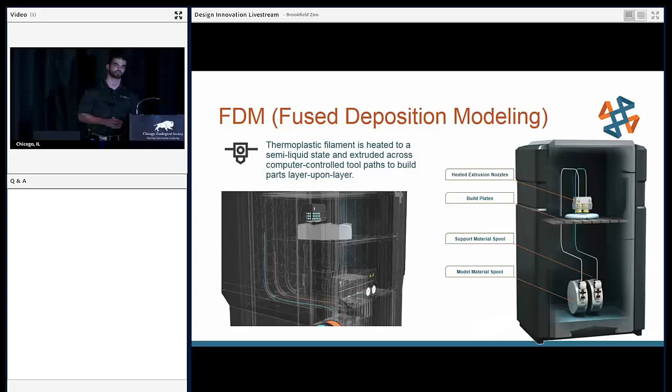So first up, like I said, we'll talk Stratasys. Stratasys has two main 3D printing technologies with polymer, the first one being FDM. FDM stands for Fused Deposition Modeling, and if you've ever heard of 3D printing, you've probably heard of FDM before. It's one of the oldest, most tried and true 3D printing methodologies out there.

So let's backtrack and just talk 3D printing in general for a second here. So the workflow and how all 3D printers operate is you have your model that you've created in SolidWorks, right? You have your 3D model. You're going to feed that into whatever 3D printer's print preparation software, and what that print prep software is going to do, it's going to take your model and essentially slice it in the Z direction vertically and create a bunch of these 2D layers to build up your part in a 3D volume through the Z axis. So where 3D printers differ is the way they go about creating those 2D layers in the physical world.

So jumping back into FDM, the way FDM accomplishes this is what we call a highly precise CNC-controlled hot glue gun, right? So we have a precise heated extruder nozzle, and we're feeding into that thermoplastic filament. And we're able to extrude that very precisely through our 2D layers in order to draw out our geometry layer by layer in the Z height. So that's how we're able to draw out our layers and build up our 3D part volume.

Here's a look at some of Stratasys' FDM systems. So you can see on the left here, we've got our desktop entry-level machines with the Mojo and the uPrint. In the middle, we have our office lineup with the F123 series. If you're familiar with the old Dimension series machines, these are the next generation of the Dimension machines. They've improved a lot in terms of build volume, build speed, as well as material options. On the Dimension machines, you only had one material, ABS. Now on the F-series machines, depending on the machine, you have between 3 and 4 materials available to you.

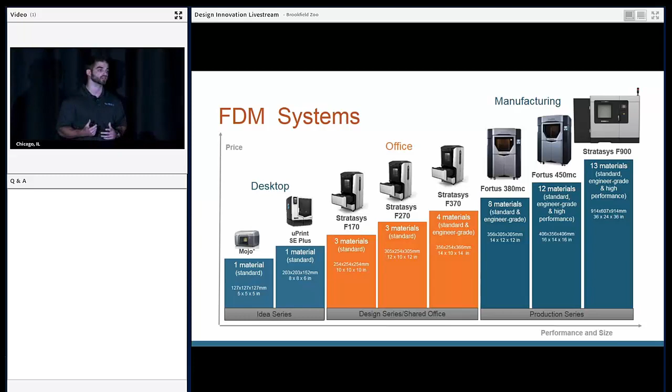So here's a look at the FDM materials we have available. Like I said, on our general side of things, we have our ABSs. ABS, if you're not familiar, is a staple in the thermoplastic injection molding industry. Legos are made out of ABS, just to give you a gauge there. We also have ASA and PLA. From there, we step up into our engineering grade materials. This is where we get into our polycarbonates and our nylon. So we're stepping it up in terms of toughness and strength there, a little bit more than what our general materials were capable of.

From there, we move into our high-performance materials. That's where we get into our Ultem resins and our carbon fiber and our PEKK materials. So now we're talking extreme heat resistance, extreme stiffness, extreme chemical resistance, things that really need to stand the test of time and abuse on the shop floor environment. And then down here, we'll talk more specifically about this one as well. ST130 is a sacrificial tooling material. More of a niche application, but it does it very, very well.

So we're going to talk about some of these materials and highlight them individually a little bit more. So first we have ESD PEKK. ESD stands for electrostatic discharge. Normally, obviously, plastics are insulators. They can potentially build up a static charge, and where that becomes an issue is if we're trying to house

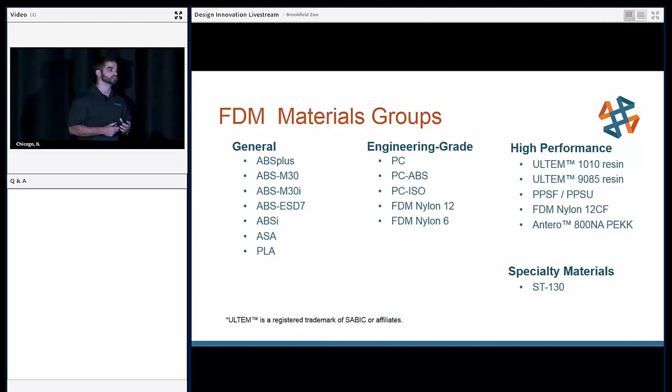electronic components. Any sensitive electronics, when that static charge builds up, has the potential to damage anything that you're trying to protect with that housing, which obviously defeats the purpose of having the housing in the first place. So with this ESD material, you can safely create electronic enclosures and know that your components are going to be safe from electrostatic discharge. PEKK material, if you're familiar with that, has excellent chemical resistance and very favorable thermal properties. So the ESD combined with the PEKK is a very useful new material we have available.

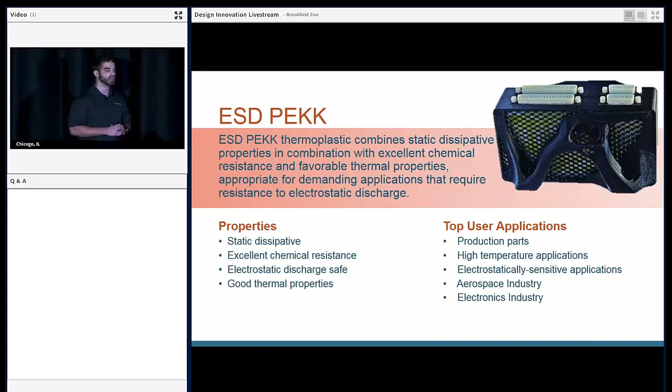Next up, this is kind of everybody's favorite hot button material currently, the Nylon 12 CF material. It's a composite material, the base being Nylon 12, impregnated with carbon fiber filaments. So we're able to lean on the extreme toughness of the Nylon 12 material, and then we get some pretty heavy-duty stiffness with those carbon fiber filaments in order to create a material that has outperformed by almost 3 times the stiffness of any other 3D printed material previously available through Stratasys.

So we're able to print very, very strong, very stiff assemblies, and a lot of customers have seen success replacing even light-grade aluminum parts in assemblies with these printed plastic parts due to the toughness and the stiffness that we're able to get with the Nylon 12 CF.

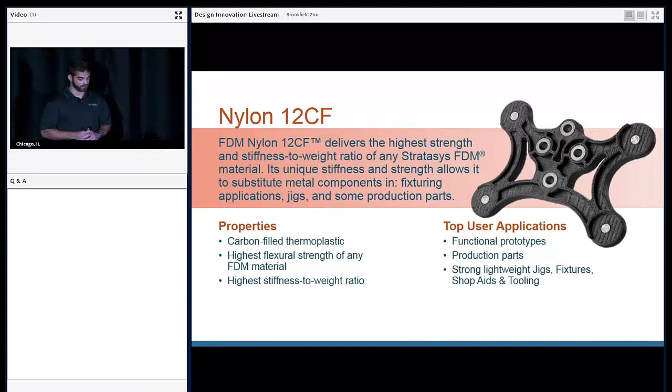Up next, we have the ST130 material. So what we're doing here is anywhere we're trying to do any kind of a carbon fiber epoxy wrap and let that cure over our mold tool. Traditional methods, making these molds by hand, it's doable, but it's very operator dependent, and it's very hard to get consistent quality results. By printing out, we can see the white there is actually what has come off the printer out

of that ST130 material. We'll take that tool, wrap it with our carbon fiber, and let that cure. Once that's done curing, we can very easily and passively soak that tool out, leaving behind what we wanted originally, which was that carbon fiber tubing. So it's a huge help in that sacrificial tooling process to be able to lean on the abilities of additive manufacturing in terms of no or low tooling and very flexible geometries, and to be able to get high quality consistent parts out of that.

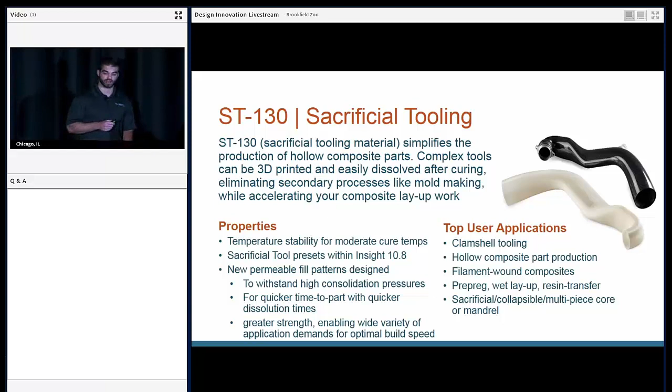ULTEM 9085 Aerospace Certified. So this is the first aerospace certified material, and Stratasys had to go through some pretty rigorous testing, not only for the material properties to be confirmed, but also for the machine making the material and actually printing the parts. It was originally a material that was not aerospace certified. The aerospace industry was very, very interested in it, and so Stratasys chose to jump through these very stringent different certifications required by the industry in order to get this aerospace certified. So there are 3D printed parts being used on different aerospace assemblies today.

Next up, we have our newest material, which is Antero 800NA. It's a PEKK-based thermoplastic. It is very physically strong and has great mechanical properties. It's not quite as strong as the Nylon 12 CF that I talked about before, but where the Antero really shines is the super high chemical resistance.

So anywhere your plastic parts are going to come into contact with any kind of corrosive chemicals like fuel or hydraulic fluid, anything along those lines, you might want to be looking at this PEKK material, as well as for the ultra low outgassing, anywhere we have very high concerns about outgassing. Where we've seen a lot of interest in this is in space applications for space stations, where we have a limited volume of air and we have to be very careful about what we bring on board in terms of outgassing. So because this material has such low outgassing, space applications are very excited about that.

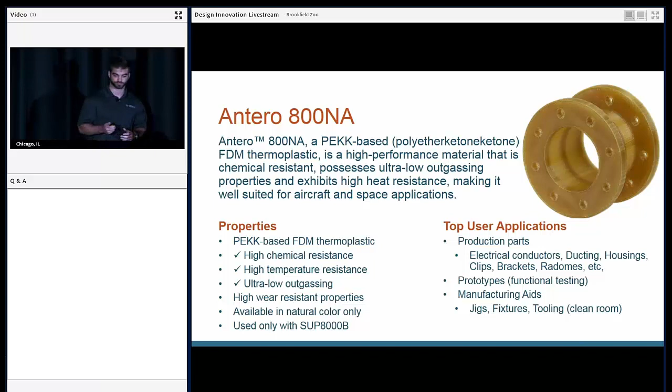So I had mentioned that Stratasys has two 3D printing technologies. We just talked FDM. The second 3D printing technology they have is called PolyJet. Now the way PolyJet works, if you remember from all 3D printing, we're slicing things in the Z layer. The way PolyJet goes about building up those layers in the Z height is very similar to how your inkjet printer works at home.

We are taking resins out of a print head and we're spraying them onto a build tray. After that build tray has been sprayed, we're passing a UV light over those liquid resins to cure them into a solid. And then the build tray moves down in the Z direction. We repeat the process over and over again, and that's how we're building up our layers in the Z height.

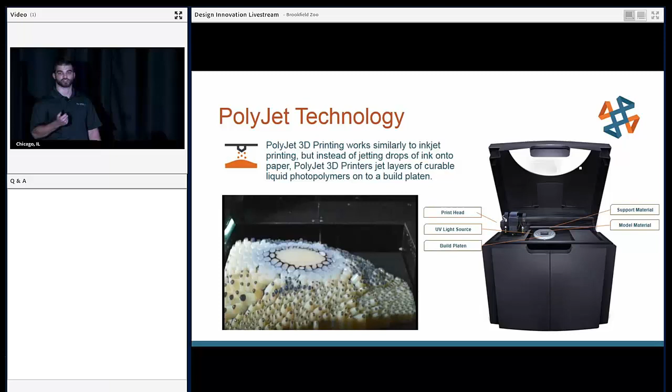What this allows us to do is get very, very fine details like you would expect off your inkjet printer at home. We can get that with a 3D printer. So now we can do different things like mixing materials, get very high resolution prints, full color prints, things along those lines is what we're talking in terms of PolyJet.

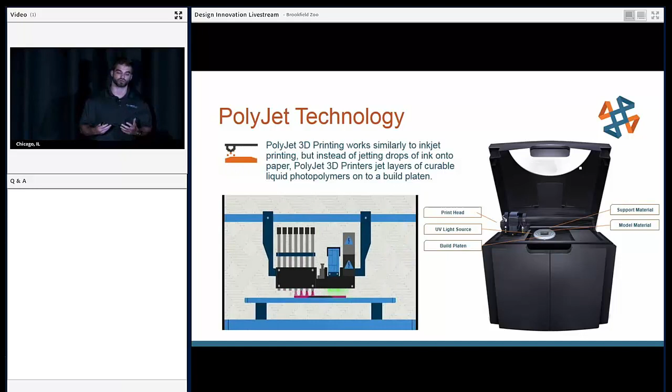Different PolyJet systems currently offered. So again, kind of same theme here. On our left, we have our entry-level machines with the Objet 30 Pro and Prime. These are just single material machines, so you are able to get very high resolution prints, but you're only going to be printing in black or white or blue, one at a time.

In the middle, we have kind of our office engineering grade Objet Eden and Connex. So these are 2 to 3 material machines. We can start getting into the material mixing realm, but we're not full color yet. Once we get up to the Stratasys J750, J735, that's when we get to our full color capability.

We have a full CMYK palette as well as clear and different rubber-like materials, and then we can incorporate all into the same print. So now we can get prints that not only have a full color spectrum on there, but include real touch, real feel, rubber-like textures, clear, all different kinds of things to create very photorealistic parts, very good for industrial designers, people trying to make end-use prototypes to get a very nice mock-up of what they're trying to do.

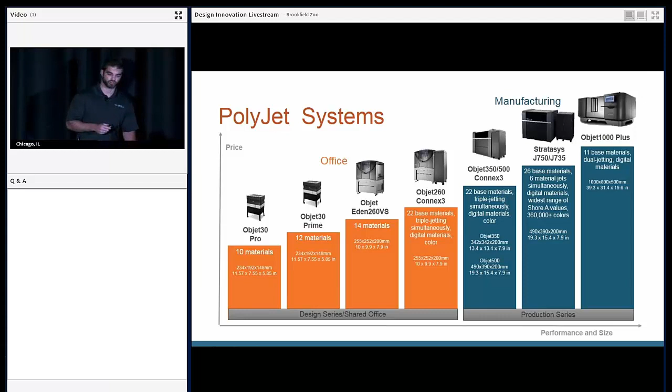Here's a look at our PolyJet materials. So on the left for our general, this is where we're just going to have our base colors, like I mentioned before, CMYK, white, clear, things along that line. I mentioned our flexible materials. So we have Tango and Agilus. These are our rubber simulations. And then we also have specialty medical. So we have dental materials, VeroFlex hearing aid materials, things along this line that really benefit from the high resolution and high fidelity of PolyJet systems.

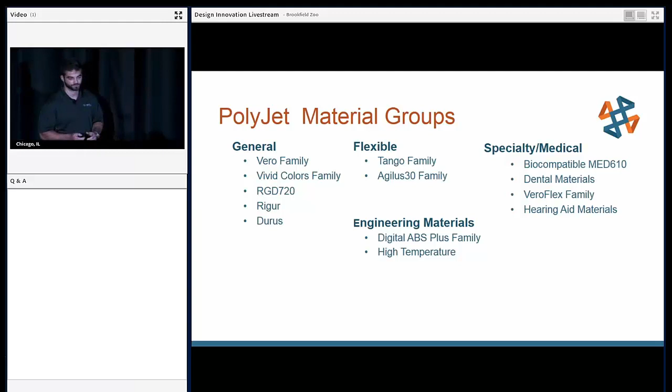So touching a little bit more detail on the Agilus 30. So if you're familiar with Tango, Tango was kind of our old rubber simulation material. Consider Agilus Tango 2.0. It's the upgraded version. So a lot more tear resistance, a lot more elongation at break, just a better simulation for your rubber applications than Tango was able to do in the past.

We also have a new lineup of vivid colors that is in the process of being released. So the original Vero colors, Vero Cyan, Vero Magenta, Vero Yellow, things of this nature had an opaque base to them. One of the things upgraded between the old material and the vivid material was that when you're trying to mix too many colors together, that opaque base kind of muddied the colors and made it very difficult to get very fine control over the color palette that you were able to print.

By switching over to a transparent base instead of an opaque base, the new Vivid Vero color family is able to have a lot finer control and expand the color gamut of the machine quite significantly. So we currently have Vivid Magenta and Vivid Yellow out. Vivid Cyan is on its way, and we are on our way to expanding our color palette from 360,000 colors upwards towards 500,000 colors. So off of a printer in one print, we can potentially print 500,000 different colors.

GrabCAD Voxel Print. So this is a software-controlled process, and what Voxel Print is, so a voxel is a volumetric pixel. So think pixels on your TV screen, right? You've got a length and a width to them. Now a voxel has a depth to that as well. And what a voxel translates to in terms of PolyJet printing, that's the smallest droplet that we can control and print at a time. So with voxel printing, we can potentially control every single droplet independently within the print.

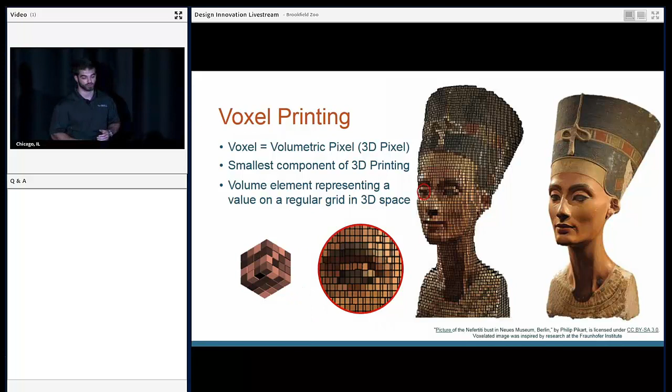You can see here, obviously, we've got this bust of Nefertiti with an over-dramatized voxelation of it. Obviously, we're going to be a lot finer with the PolyJet technology. This is very useful for artistic things like this, as well as controlling the internals for medical models and mechanical models. So how voxel printing essentially works is, if you can imagine, if you have 1,000 progressive slices like below, you can stack them together as they change through space and create a very, very unique, interesting model here as we're controlling the internals very tightly through voxel printing.

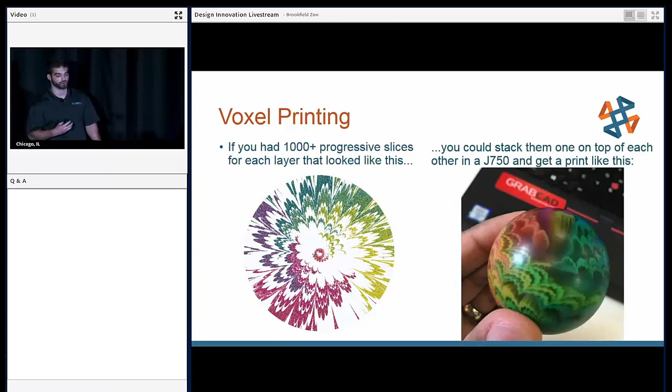So like I mentioned, we have very high use in the medical industry where we want to control that internal geometry and make it exactly how we were looking to get it, as opposed to just a kind of a color wrap around the outside. Now we're able to control that internal geometry very, very tightly.

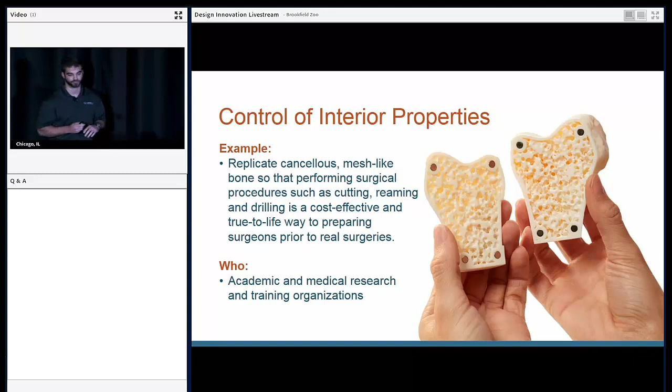Additionally, a great use case for voxel printing is Laika Studios. If you've ever seen the movie Boxtrolls or Coraline, it's in their portfolio. Laika originally came to PolyJet. They really liked the technology, but their one complaint was the eyes. They weren't able to get the eyes as lifelike as they needed to, and something that was very, very important to them, a complaint was zombie-like or dead-looking eyes.

So by being able to use voxel printing, they're able to give their eyes much more depth, much more color, and give them that lifelike ability that they were looking for to make a lot more believable character for their films. So Laika is a huge proponent of voxel printing and uses it constantly. So what they'll actually do is they'll print out all the faces and different actions of their characters and use those for their stop motion animation films, as opposed to what they were doing before by hand. So it speeds up their process a lot more.

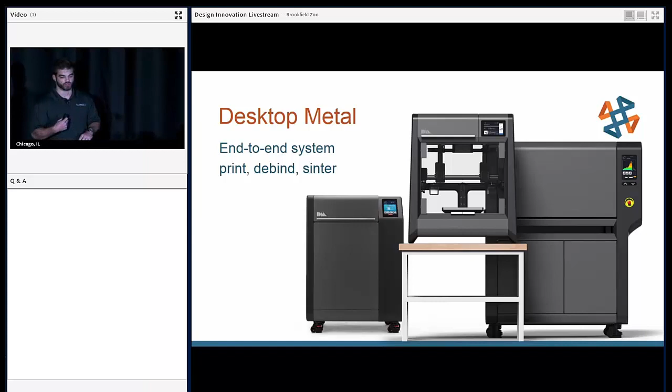One of the most exciting things about the Desktop Metal system is that it's about 10 times cheaper than traditional powder bed fusion systems. So we can see the comparison between powder bed fusion and the DM Studio system there. So if we're just looking for metal prototypes in the office, the DM Studio system is a great economical way to get started down that path.

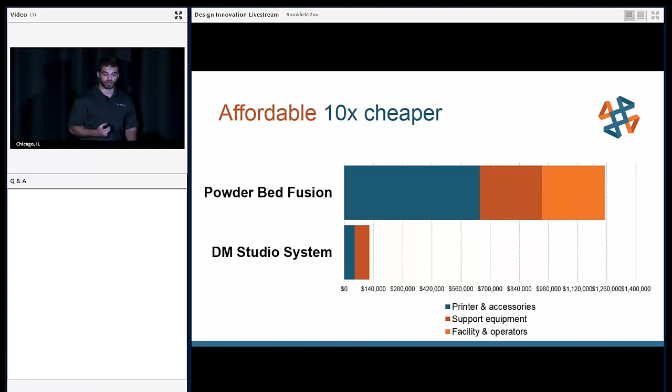So again, the idea behind this system is office friendly. We want it as office friendly as possible. We don't want metallurgists on staff. We don't want to have hazmat suits in order to operate our equipment. We want to be able to get parts very, very quickly. Here's a high overview of the process.

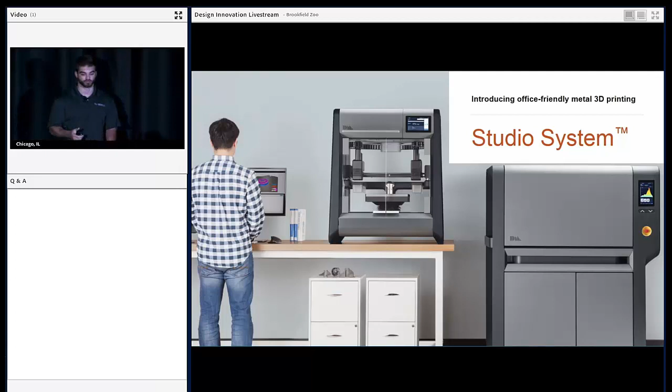So we start with bars of feedstock, and this feedstock is comprised of about 80% metal powder, 20% polymer binder. And what that allows us to do is we feed that into, like I said, an FDM style print head, so a heated extrusion nozzle, and we melt the plastic and flow the metal powder out. So we're nowhere near metal melting temperatures at this point. We're just melting that plastic and using that plastic as a vehicle of transport to flow that powder out and create our print.

So then we get all the benefits of 3D printing. We don't have tooling. We don't have long setup times. We don't have long programming times. We can just get that nice flexibility of 3D printing in a metal environment.

From there, we move to our debind, which is a liquid debind bath, and what that does is it soaks out our polymer binder. We don't want that polymer binder in there because when we move to our sintering process, it's going to really screw with our metallurgical properties and it's going to make for a large mess. So we really want to get that polymer out of there in the debind phase, and then from there, we move into the sintering phase, and that's when we heat the semi-metal object up to just below its melting point, and then those particles coalesce together and create a fully dense metal part.

So here's a closer look at the Studio System printer. Like I've been saying the whole time, very similar to FDM, very familiar design guidelines, and the biggest selling point, in my opinion, is the office-safe material. Normally for metal 3D printing, you're dealing with metal powders. Those can get in the air. Like I said, you have to have a hazmat suit. If you inhale any of that, that's very, very serious, and you really don't want to be handling that powder. So in order to be office-safe, they went with the metal rod design.

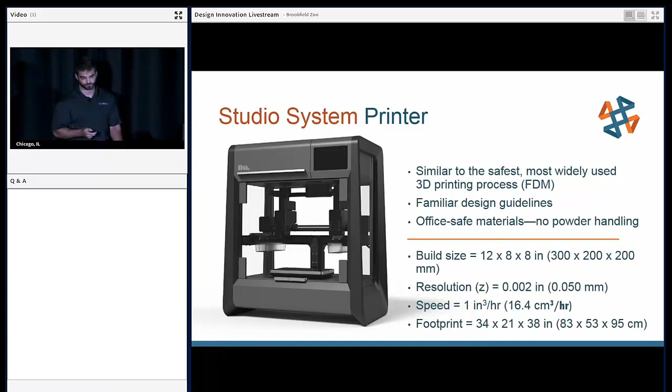Here's a look at the material swapping process. Again, in powder-based systems, when you want to switch over from 17-4 to 4140, you have to clean that machine out, you have to vacuum that out, and make sure you get every particle of that old material out of there to make sure that it doesn't mess with the mechanical properties of what you're trying to print in the new material.

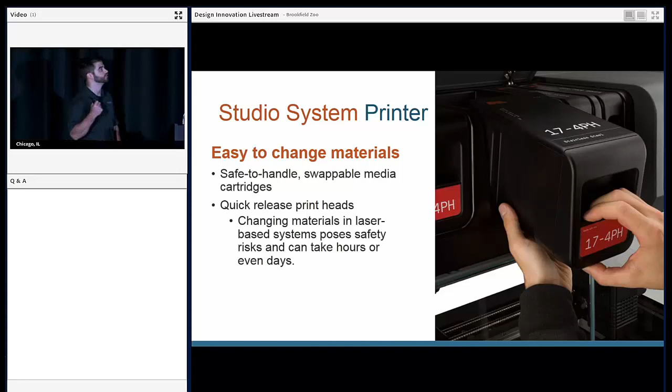For the Studio system, all that's required for a material change is swapping in and swapping out those cartridges. Like I've been saying this whole time, there's no hazmat suit. You don't need to vacuum out any kind of metal powder or anything like that. It's a very quick and easy click in, click out material swap.

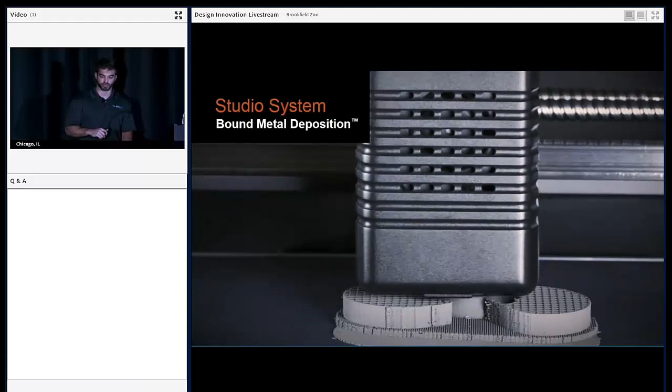So here's a look at the printer running. We can see it moving around, printing our part out. We've finished the print. This is just a propeller print. From here, the material is almost clay-like. I said 80% metal powder, 20% polymer binder. It's nowhere near metal at this point. If you drop it on the ground, it's going to break.

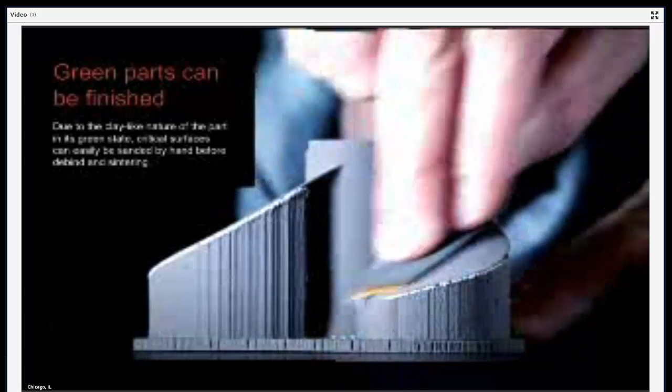But what that allows us to do is a lot of hand finishing in this stage. We can take some very, very fine sandpaper and make some of those surfaces a lot nicer before we're in that metal state where it's a little bit harder to get that nice surface finish on there.

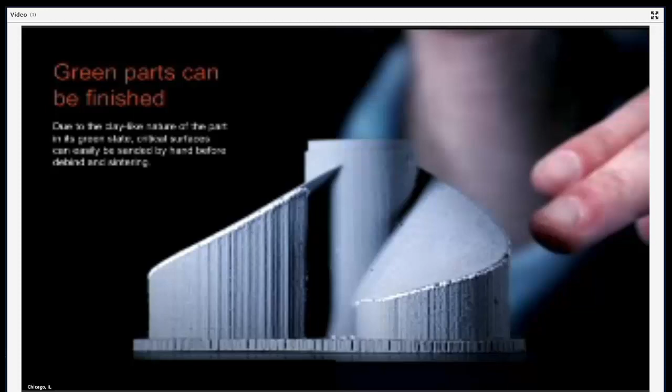From there, we move to our debinder. We soak out that polymer binder. And then we move on to our sintering furnace. We heat it up and we get our fully dense metal part.

A nice feature of the Desktop Metal system as well is, if you can see on the left there, that's the support structure for a powder bed fusion. On the right, we can see a video of someone removing the supports from a bound metal deposition process, which is the DM Studio process. The DM Studio system will actually print in between where supports and model touch an interface layer of ceramic material. And what that allows us to do, as we just saw in the video, is just by hand pop away our supports.

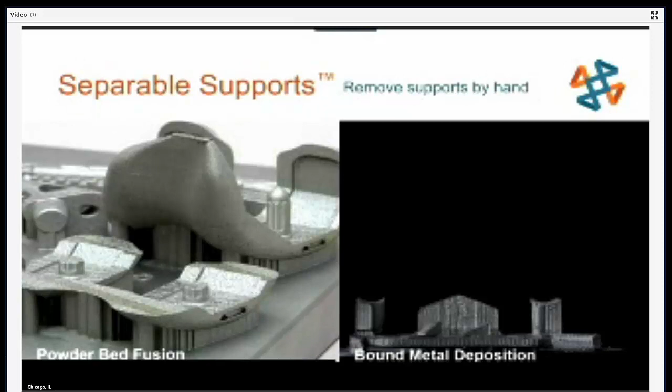Again, whole theme of office friendly. We really don't want to have a bandsaw to remove parts from the powder bed fusion on the left, or an angle grinder or anything like that in an office environment. We really just want to be able to pop it off by hand and move forward from there.

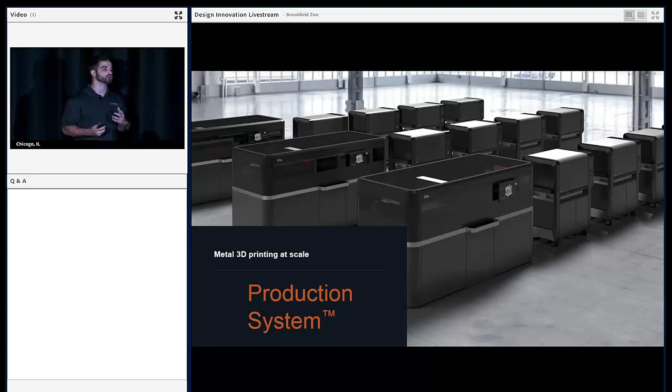Here we have Desktop Metal's production system. We were just talking about the Studio system, which was focused on prototyping, small batch runs, things like that. The production system is metal 3D printing at scale.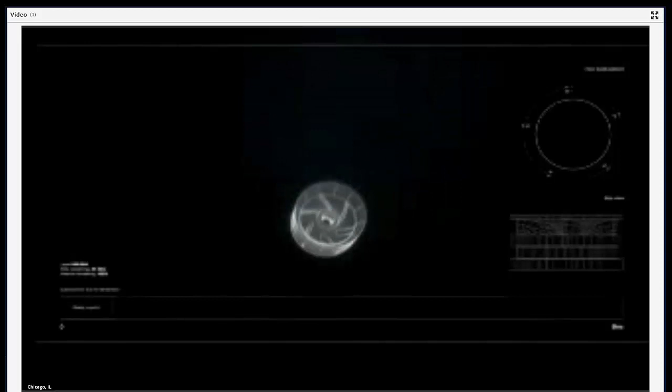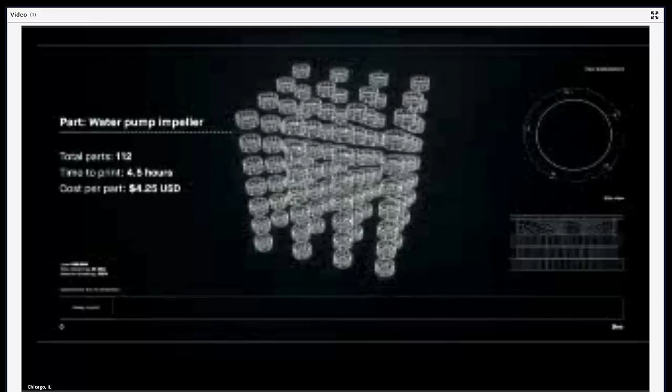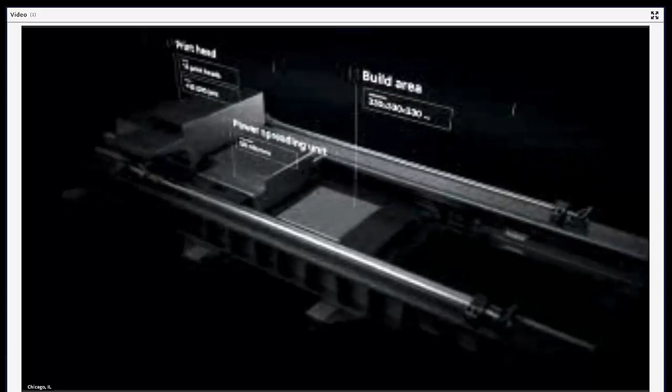Metal 3D printing could change much of the world around us if it was fast enough and cheap enough for mass production. Introducing the production system, powered by single-pass jetting. At up to 100 times faster than laser-based systems, it's the first metal 3D printing solution for mass production. It works by combining 2 powder spreaders and 1 print unit into a single pass system to both spread metal powder and print. Unlike existing metal 3D printing, there is no wasted motion with single pass jetting.

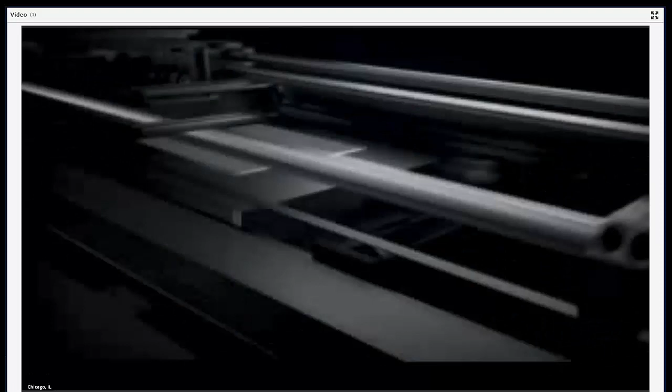A single pass starts in the powder spreader, where a metering system deposits metal powder, and a compacting system forms a layer as thin as a human hair. The print bar follows, jetting droplets of a binding agent. Millions are jetted per second, binding metal powder to form high-resolution layers.

Anti-sintering agents are then deposited, making it possible for supports to fall off after sintering, saving hours of post-processing. Once the layer is dried, the process repeats itself. Single-pass jetting is bidirectional. We combined all the necessary steps for printing into a single pass, so that whenever there is movement, there is printing. This makes it possible to print parts in minutes instead of hours.

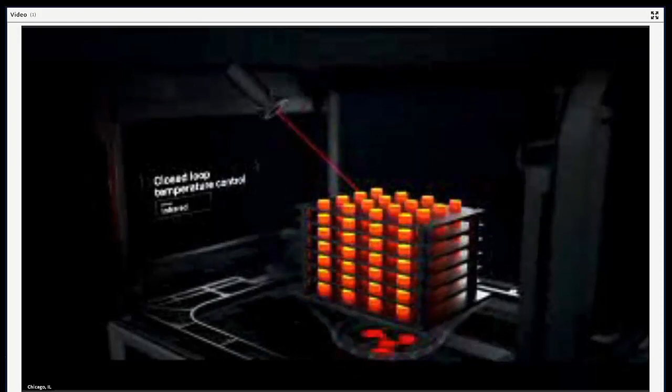Once printed, the green parts are heated to just below their melting point. Binder is removed, and metal particles are fused to form a dense solid. The production system is cloud connected. Sophisticated software manages the entire workflow with profiles that are tuned to every build and material, from the printer to the furnace, delivering dense metal parts.

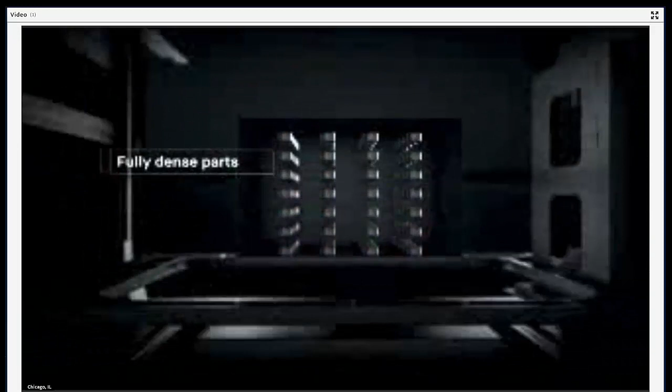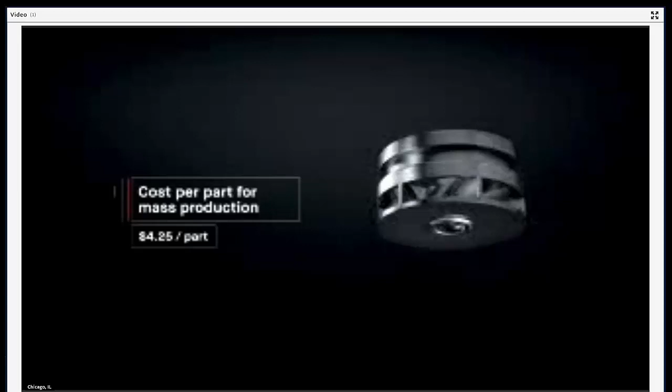The result is sheer throughput. In the time it takes laser-based processes to produce just 12 impellers, Desktop Metal single-pass jetting technology would have produced over 500. To date, metal 3D printing has been too expensive and too slow to change the world around us. At up to 100 times faster than existing technologies, the production system unlocks the cost per part needed for mass production. For the first time, it's possible to go to market with metal 3D printing.

So I think that's a pretty cool video. It shows really the potential for this for mass production. If you remember from the previous slides, I had mentioned that current FDM technologies are at about 1 cubic inch per hour. This technology is slated for about 500 cubic inches per hour, so significantly faster for that mass production environment.

Next up, we'll talk Roland CNC milling machine. So we've been talking additive, jump over to subtractive for a little bit. So what are the advantages of a Roland CNC? Why subtractive over additive? One of the things that Roland does really well is it fits in your office, home, or classroom environment. They're very good at dust control, things like that. Additionally, it's all designed around ease of use.

So it comes with a free SRP Player software. The nice thing about this software is if you have people on staff who really aren't familiar with CNC programming, really aren't machinists by trade, they're more design engineers, things along that nature, the free SRP Player software really makes the transition to start using this equipment very, very easy.

Now, that being said, if you do have someone on staff who's familiar with writing G-code, making machine tool programs, the SRP Player software has that functionality built in. So it's kind of as much help as you need or as much functionality as you want to get out of it.

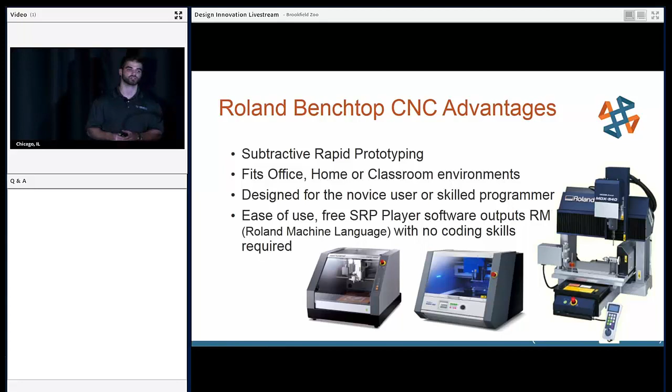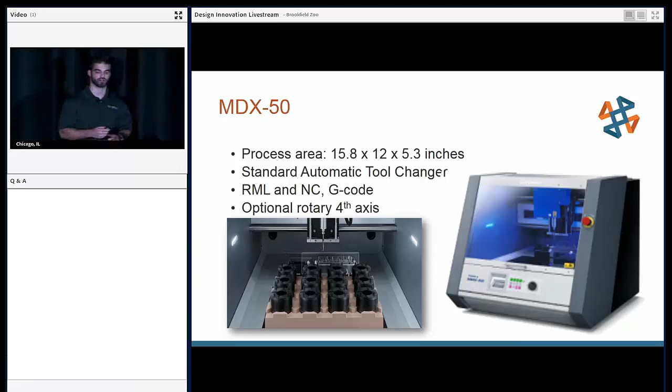The MDX-50, kind of the mid-level grade milling machine. You can see our process area about 16 by 12 by 5. It comes standard with an automatic tool changer and is run off of RML NC G-code, and we have an optional rotary 4th axis on there. So a lot of functionality in a smaller package is very, very nice to have. MDX-540, a little bit larger process area, about 19 by 15 by 6. 4-position automatic tool changer again as well, with additionally an optional rotary 4th axis.

So what this machine can do, the MDX-50, we're going to be doing materials like foams, plastics, woods, things along this nature. With the MDX-540, we're able to start getting into things like aluminum and brass. Anything that's a non-ferrous metal, we're able to cut with the MDX-540. CNCs have a superior form, fit, and finish. They can hold very, very tight tolerances with a CNC, create exact and stable form parts, snap fit parts, things along this nature, and really hold very, very tight tolerances.

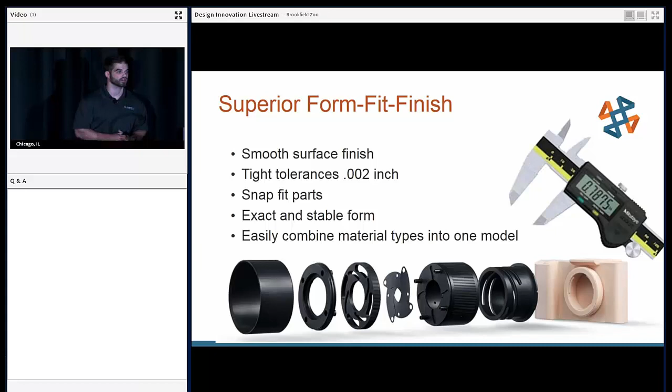Case study on just a comparison of an example part here. So we have a fixturing prototype. We can see the cost for material, labor rate, or internal cost around $50, right? We job that out, get that quoted at $375. You can see right there the numbers in terms of dollars, what we're talking in savings. The dollar savings are always nice, but in my opinion, the thing that is even better about a solution like this, and this even applies to both 3D printing and CNC milling, is the time savings. You can see here part build time, 4.2 hours.

I would like to see a job shop that would get you that back in more than a couple of days without a rush charge on there. So we can get that back. We can come in the morning, want to test out this prototype, set it on the mill, and by lunchtime we can go out on the floor, test this prototype, see what we're trying to do with it, and make our tweaks, whereas before our entire process was just lengthened by waiting and waiting and waiting on these job shops. So bringing that process in-house really helps speed things up.

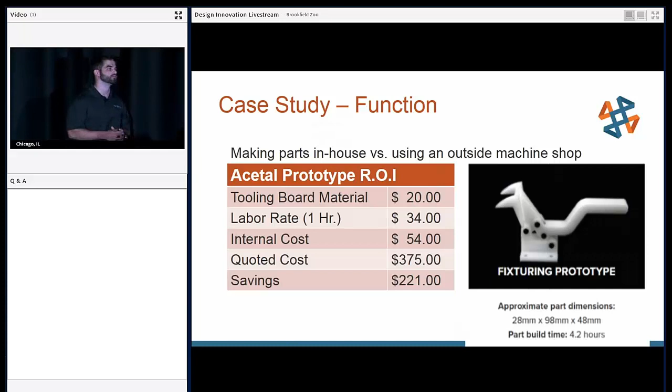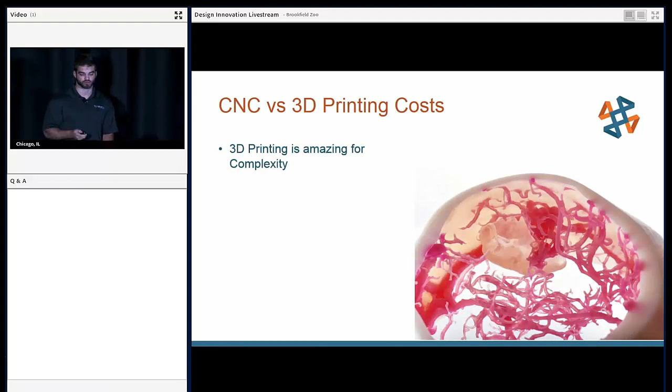Comparison of CNC versus 3D printing. So 3D printing is really good for complex organic shapes. Not all parts need to be optimized. So here for a CNC we see a very blocky part. This is actually a project I did, a fixturing of a 3D printed part. This part was actually milled out of foam, and so this is something that we could definitely 3D print. I mean, you load that up in the printer and it's going to chug away and it's going to give you a part, but such basic geometry may be a better candidate for milling.

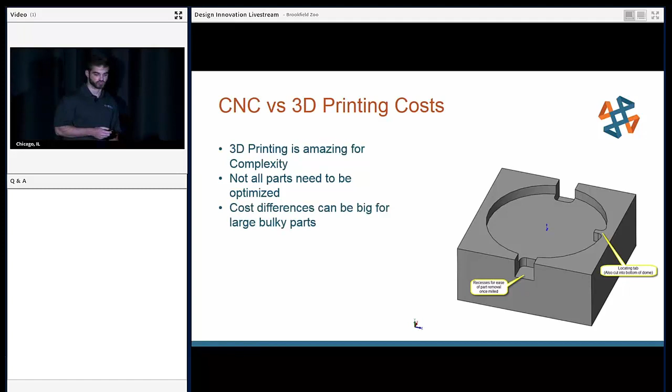Here you can see cost differences can be big for large, bulky parts. So here's a comparison of a couple of different ones: our PolyJet, our FDM, and then our MDX 50. So you can see for yourself, PolyJet's going to take a long time. We're going to get a really, really nice fine surface finish on that, but it's going to take around 9 hours to do it and $100 in material. FDM, we're a little bit faster. We're able to do it in a thermoplastic, which is nice, but $30 versus our $3 worth of machine foam, and we can have this cut on the mill in about 4 minutes.

So this is an optimized program. Like I said, I designed this fixture with the idea of throwing it on the mill. I used all the same tools, so we didn't have to go through any tool changes. This was really one where I was trying to crank this out as fast as possible, and that's something that you can do with milling, is have a little bit more control over that and go through something very, very quickly.

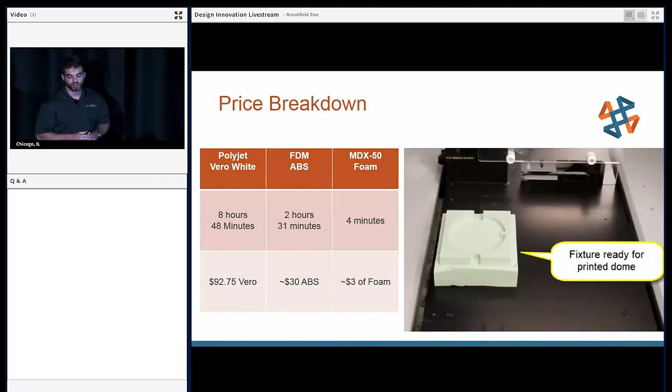So the entire project behind this particular fixture, the idea was, how do we incorporate additive and subtractive together? How do we lean on the strengths from both of those technologies to create something entirely new? So one thing from 3D printing is that we're always trying to keep in mind our print orientation. If you remember, we're slicing parts in the Z height, right? What that translates to is it's often a trade-off between surface finish, part strength, and fidelity of different features. Sometimes you have to make a choice of, these features are more important to me than these. I'll get nicer resolution on these, versus these other ones over here may not be optimal for the print orientation I've chosen.

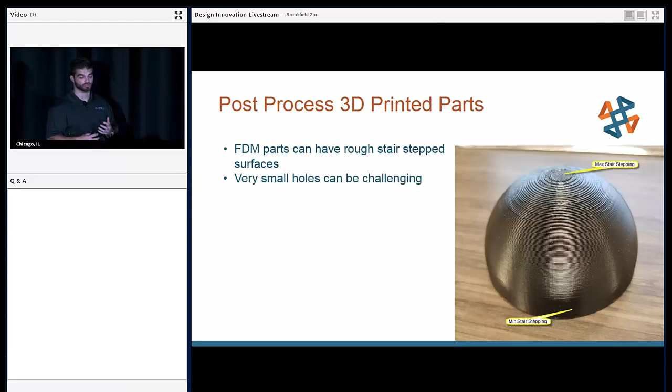So what you can see on the screen here is just a dome, just a very basic dome, and it's showing that on vertical walls for 3D printers you're getting a very nice surface finish, and on the top you're getting what we call stair stepping. So again, we're building in layers, and those layers have a finite thickness, so at a certain point we're going to layer out and create this stair-step effect over more horizontal curvature. Also, very small holes on a 3D printer can be somewhat challenging. And again, going along that theme, we're kind of having to choose between strength or aesthetics sometimes.

So what we can do with our mill is different surfacing operations and different boring operations to drill out holes and finish surfaces a lot nicer and still get that flexibility of the 3D printer. So this was essentially just a test to see what kind of surface finish we would get best based on depth of cut. You can see on the left, again, was that dome straight off of the 3D printer where we have our stair stepping on the top of the part.

On the right is the part in that foam fixture that I had cut out on the mill, and then actually ran a milling program on the surface of that dome. And if you were to look at the top of the part, it's actually a helical cut where at 0 degrees was a 0 depth of cut, and then as you go around it ramps up to a full, it was actually a 26,000th depth of cut.

So it was just a project for me to see where, in terms of 3D printed layer height depth, we want to cut our finished parts to give them the nicest surface finish. So you can see there the kind of surface finish that we're able to get off of an FDM part, combining it with the Roland mill.

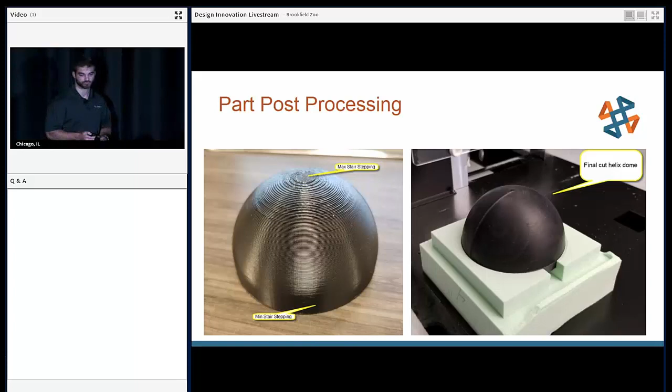Finally, we have our MaxSHOT 3D, which is a photogrammetry system. If you're not familiar with photogrammetry, the basic idea is we're taking a bunch of 2D photographs and using references within those photographs to stitch them together and create a 3D volume. That allows us to take very, very precise measurements over very, very large volumes. We see this a lot in the aerospace industry, where someone wants to measure maybe tip to tail on a 747, and we can hold that within a few microns of accuracy over such a long distance.

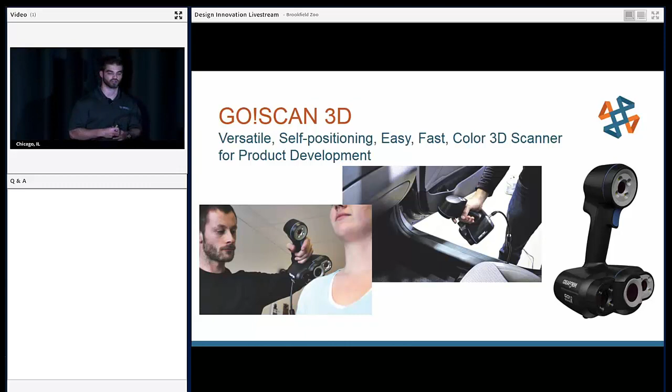So first up, we'll talk Go!SCAN. The Go!SCAN 3D is our entry-level white light-based scanning solution. White light scanners are easy, they're fast, they can pick up colors and textures. They're a very nice introduction to the scanning environment. So taking a step back, in terms of general scanners, what two pieces of information do scanners need to operate?

The first one is the scanner obviously needs the surface of your part. The way the Go!SCAN acquires that information, it projects that square that we can see on the seat there. It actually almost looks like a QR code. The scanner knows what that QR code is supposed to look like on a perfectly flat surface, then it looks at what it's currently seeing, and it can use the difference between those two to create the 3D surface of our part. That's the first piece of information the scanners need.

The second piece of information is where to put that surface. Now we've created this nice square of surface data. Where do I put that relative to the rest of my data? We need to be able to trace ourselves back to our origin and essentially leave a trail of breadcrumbs as we work our way across our part to stitch all of our data together. So how does the Go!SCAN create this trail of breadcrumbs? It's a system they call intelligent hybrid positioning.

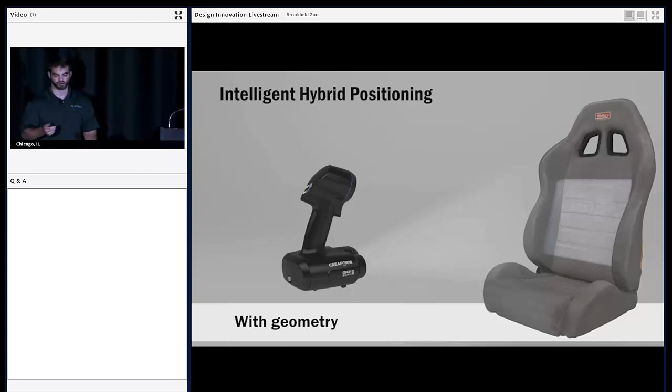The first methodology it can use is geometry. So think facial recognition. The scanner is recognizing possibly the seams in that seat. As I move my hand along, a couple of degrees to the right, the scanner is saying, hey, I recognize those seams, I know where I am, I've moved a couple of degrees to the right. So we can use unique geometry on the surface of the part to create our reference frame around that part.

The second way, as I mentioned, white light scanners can pick up colors. So anywhere there is a color differential on the surface of our part, we can pick that up and use it as a reference frame as well. So we can continue across the surface of the part even though it's flat, as long as it has some sort of color differentiation.

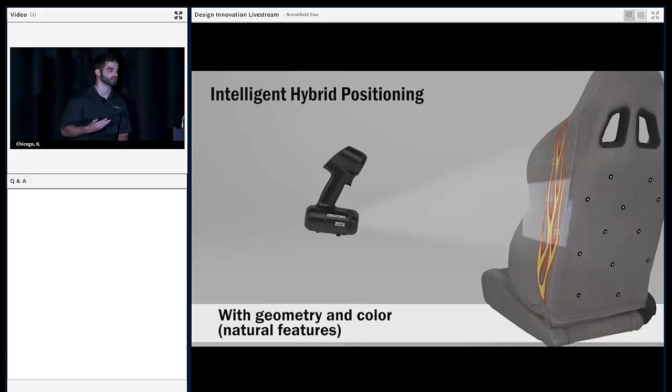Anywhere on our part that doesn't have unique features or unique color differentiation, like the back of this seat, we would essentially be lost if we didn't have these man-made reference targets. We have little positioning target stickers that you can add onto your part, and the scanner recognizes those as reference targets, so we can continue to chain our reference frame across the entire surface of the part. So now we're able to use geometry, colors, and positioning target stickers to create a full reference frame around our part and get all the scan data that we need.

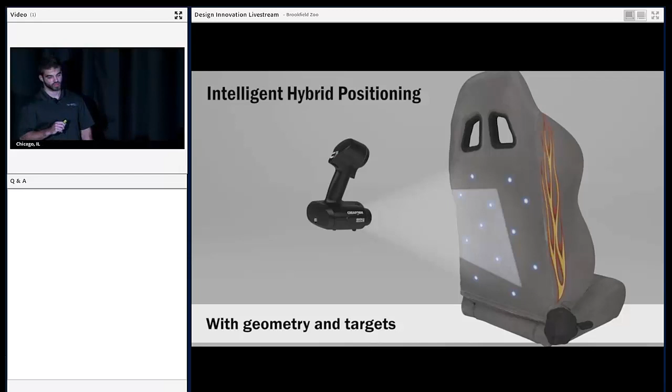So you can imagine you've got a flat plane, that's your nominal perfect plane, right? What the scanner is doing is it's constantly creating points along that surface of the plane, and there's always going to be some sort of small error involved where it places those points. What accuracy means is how close to that surface are those points that the scanner has created. So with the Go!SCANs, we're able to create points with an accuracy of plus or minus 4/1000ths of an inch. So all our points are going to be within 4/1000ths of an inch plus or minus of that true nominal surface.

What resolution is, is how dense those points are packed on the surface. Same thing as resolution on your TV screen. The more pixels you have on your TV screen, the finer detail you can capture. Same thing with the scanners. So if you have a feature that's lower than the resolution of the scanner, it won't be able to pick that up because it doesn't have enough point density to be able to create that feature.

Now, if we have a good resolution compared to our feature, we'll get a nice crisp feature on the surface of that part. So what resolution comes into is minimum feature size that we can accurately scan. What accuracy comes into is what are your tolerances? What tolerance requirements do you have for your part?

Getting back specifically to the Go!SCANs, now that we know about resolution and accuracy, the Go!SCAN 50 has a lower resolution, and the Go!SCAN 20 has a little bit higher resolution. The Go!SCAN 50 has a much larger scanning area than the Go!SCAN 20, about 15 inches by 15 inches for the 50, and about 4 inches by 5 inches for the Go!SCAN 20. So what we generally recommend is the Go!SCAN 50 for larger parts at a lower or more rough resolution, where the Go!SCAN 20 is for smaller parts where you need a higher resolution.

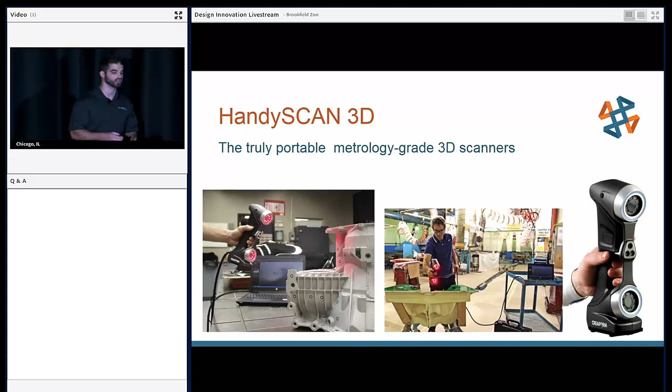QC, again, very, very big. We're taking scans of our parts, overlaying those onto the CAD models of those parts, using that CAD model as the nominal, and spitting out a report that says, hey, out of your 500 measurements, these 10 are out of spec and here's how far out of spec they are.

So it really speeds up that process, whereas with a CMM, each of those 500 points, you have to measure those one at a time. So you're going through that serial process. Whereas with scanning, as soon as we're done scanning the part, we feed that scan mesh to the program and it spits out our measurements very, very quickly. So we're going through our inspection process a lot faster.

Always good for reverse engineering and aftermarket equipment. So if you can't get the CAD from the OEM, they don't want to give it out for whatever reason, it's very nice to be able to have that part on your desk, scan it up, use that in SolidWorks as reference to create your part that's going to then mate up to that part, and that's your final product. Very, very useful there.

Maintenance, repair, and overhaul. So now we can take scans of tooling and different machines. Let's say we get a tool in, a mold in, we scan it up on day one and we save that. That's our day one scan, right? Now we're going to run it for 6 months. We're going to scan it up again. We're going to overlay those scans. We're going to see where our tool is wearing out.

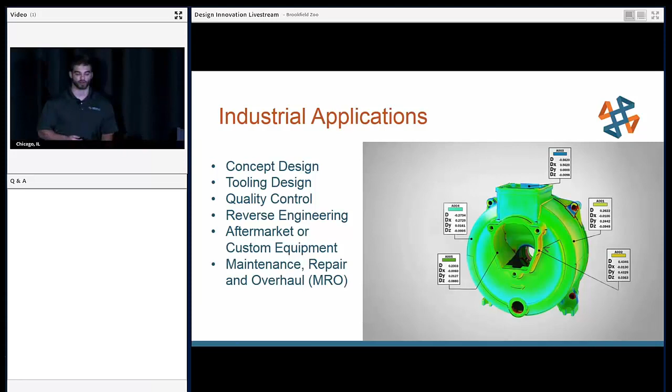So a little bit about how the Handyscan operates. The Handyscan is a laser-based system, whereas the Go!SCAN from before was a white light-based system. A couple of key differences there. The lasers can't pick up color, and they can't pick up the unique geometry on the surface of the part. If you remember, we always have to have a trail of breadcrumbs back to our origin.

So the way that this Handyscan achieves that is with those positioning targets. So we put the positioning targets on our part, and from there we can build our reference frame, and then the scanner will recognize the targets, create our origin, and then we can scan across the surface of the part.

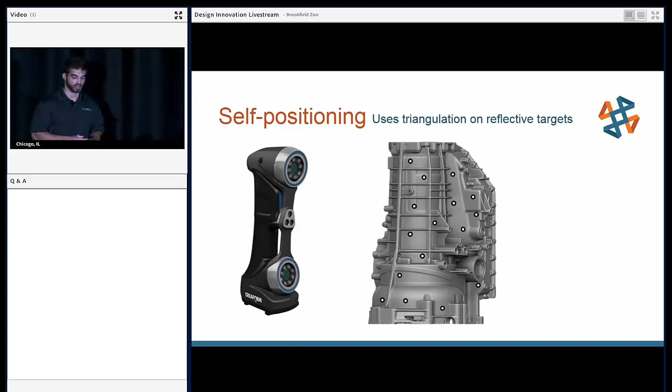So we have 2 models of Handyscan, the 300 and the 700. Again, looking at our resolution and our accuracy numbers here. We're about 100 micron resolution for the 300 and 50 micron resolution for the 700. Accuracy is 1.6 thou versus 1.2 thou versus the 4 thou for the Go!SCAN. So we're getting a lot tighter here, and this kind of plays into that NIST certification as well.

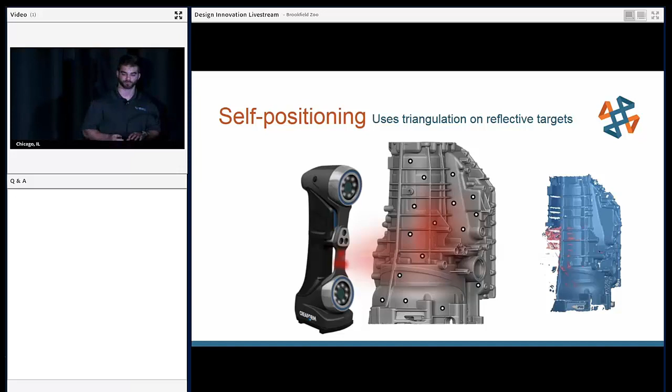Key differences as well between the 300 and the 700. If you saw on the last slide, it's a little bit difficult to see here, but I am going to be doing a live scan at the back at the end of the presentation that you'll be able to see more clearly. It projects kind of a crisscross pattern of lasers on the surface of the part. The 300 has 3 laser lines that crisscross, the 700 has 7.

So obviously we've got a little bit larger of a scanning area, more data being acquired with the 700 per second. Additionally, the 700 has what's called a single laser mode. So instead of a crisscross pattern of lasers, you can swap to a mode where we're just shooting a single laser line. And what that's very, very useful for is getting down into nooks and crannies and crevices and things like that.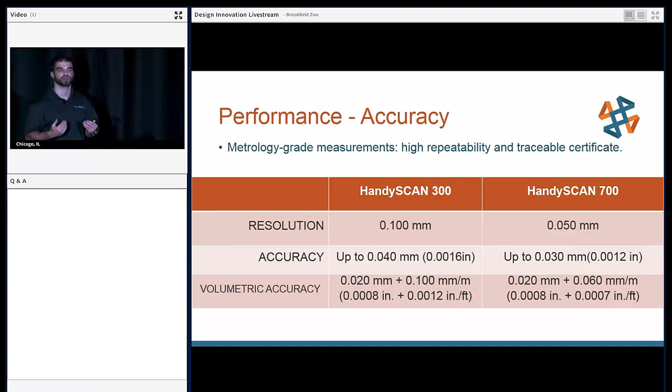All of these scanners are vision-based systems. The white light, the laser, all of it is dependent on some sort of light and some sort of camera system feeding back in that data from that light. So what I always say is if you can't see it, you can't scan it. And where this ties into with the single laser mode is getting down into bores.

If that bore is too tight in terms of the focal length of our scanning lenses, it's very difficult to get down into without that single laser mode. So that's why that single laser mode is very, very useful if you know you're going to be looking for hole measurements and things along that nature.

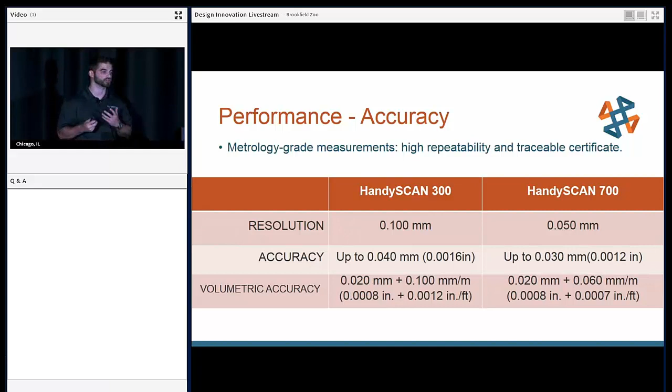Next up, we have the MetraSCAN. So the MetraSCAN is going to be very similar in terms of accuracies to the Handyscan, but where it's going to shine and outshine the Handyscan is larger volume scans. So if you want to scan up an entire car and get that entire mesh, it's going to be able to hold that accuracy much tighter over that larger volume than the Handyscan or the Go!SCAN would be able to.

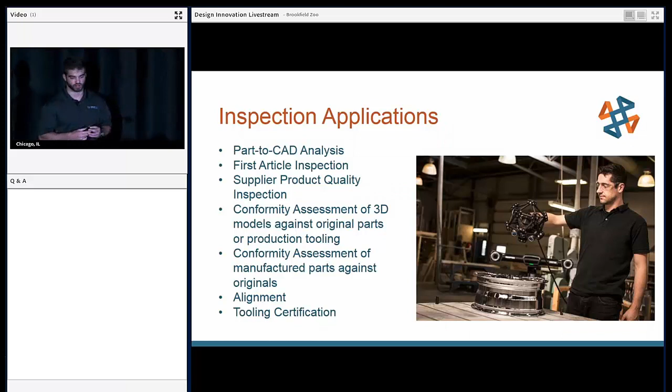So you can see different accuracies and volumetric accuracy numbers here for the MetraSCAN, different models, 350, 350 Elite, all the way up to the 750 Elite. And again, we can see the accuracies are very similar to the Handyscan, down to 1.2 thou.

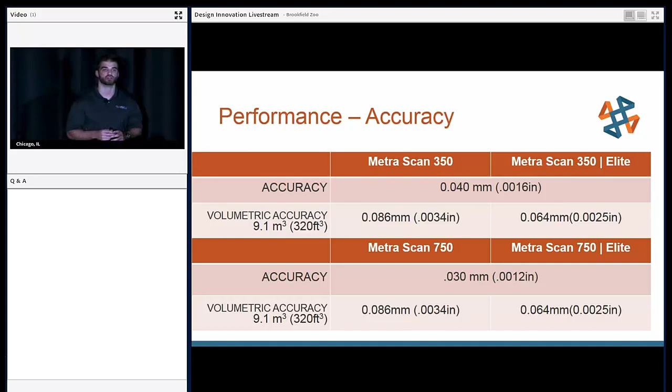Next up, we have the Handyprobe. So again, this is now, instead of surface data, we're grabbing probe point data, but we're doing it very, very accurately. So again, you can see we've got targets on the probe, and you can guess, yes, the C-Track is involved in this process as well.

Where this really shines is where we have large parts, and we really need that flexibility where they're not fitting onto the bed of our CMM, or we want to be able to go out to the shop floor and do this very quickly and not haul this big part into the quality control lab and try to figure something out. We can just go out and do this very flexibly with the Handyprobe system.

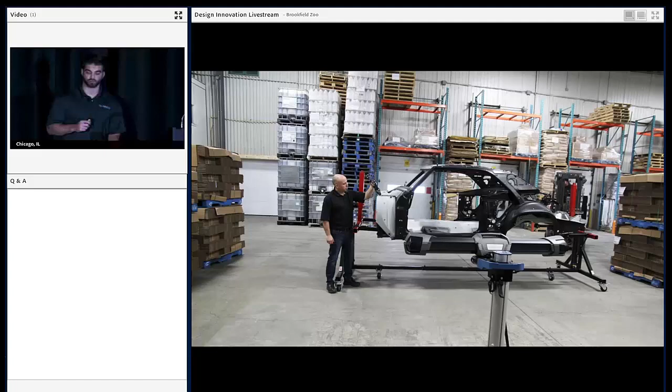So you can see same part. We've got the C-Track in the foreground again, and now we're probing points with that wireless probe. 2 models of Handyprobe, the Handyprobe Next and the Next Elite. Now we're able to get down to 8/10 thou accuracy with that Next Elite versus the 1.2 of the Metra and the Handy.

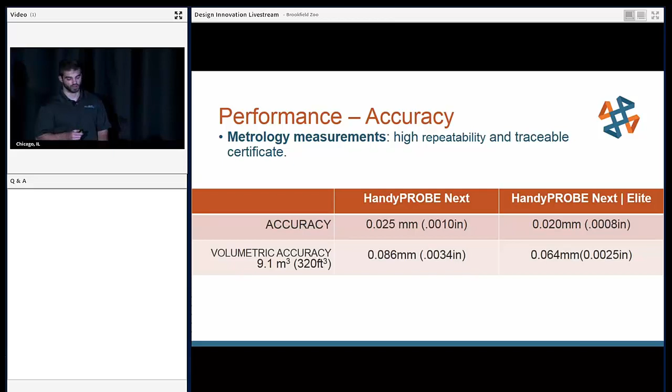Finally, let's talk MaxSHOT Next. This is for very, very large parts. Like I mentioned, aerospace likes this a lot for very large distance measurements. So we're taking 2D photographs, stitching them together to create a 3D volume and grab 3D measurements from that volume.

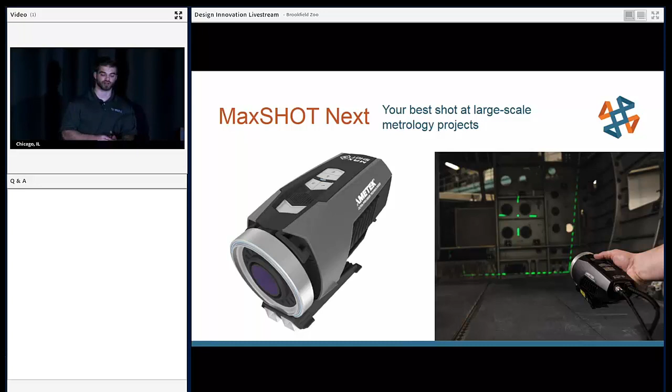So really the minimum size that we're trying to take measurements off of is 6 feet, and we really just go up from there. Really, really strong volumetric accuracy with the most uniform error distribution of any of our scanning or metrology options available. So you can see here we're taking photographs of the interior of an airplane.

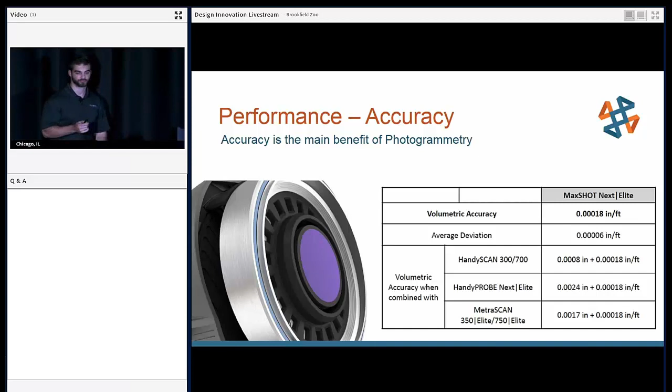A success story utilizing a good portion of the scanning technologies available through Creaform. So Jet Aviation, a team of Creaform application engineers, reverse engineered a Boeing 737. This was a project that they had originally predicted to take 3.5 years with a cost of $2.3 million to be able to get a CAD model of this aircraft interior. Creaform was able to complete it in 4.5 months. So 4.5 months versus 3.5 years.

You can really see how these hand scanners are really speeding up people's workflows in these reverse engineering applications. So we're able to grab a whole, very accurate look at these interiors, whereas before we're taking hand measurements, things along those natures, which are not only inaccurate, but very time consuming.

So now I'm going to switch over to a live scan demonstration. I have a demo part up here, and we're going to be able to see the scanners work in action.

Are you still up here?

Good. Okay. So what I have brought up, this software is called VX Elements. It's Creaform's brand of scanning software. So we have a couple of different modules, a module for reverse engineering, a module for inspection. That being said, the scanners are software independent. So they will work with other softwares that accept scanners as well. So if you have something like Geomagic Design X or Polyworks, the scanners will work with that as well.

So here I have my demo part. As you can see, I've got all my positioning targets pre-placed on here. And again, what this is going to allow me to do is create a reference frame around my targets, around my part, to make sure that I can accurately place my scanning data. So I'm just going to start up the scan here. It's a very simple process.

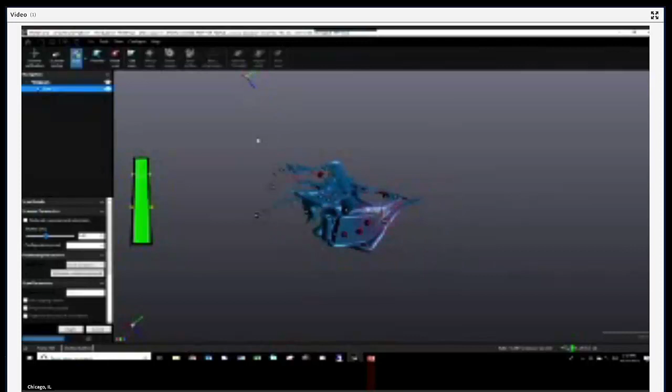The reason that I can do this while in the air is because my reference frame is only relative to my targets. The scanner doesn't know if the part is moving or if the scanner is moving. All it knows is that it's moving relative to the targets. This is pretty cool for demo uses. It gets some nice oohs and ahs.

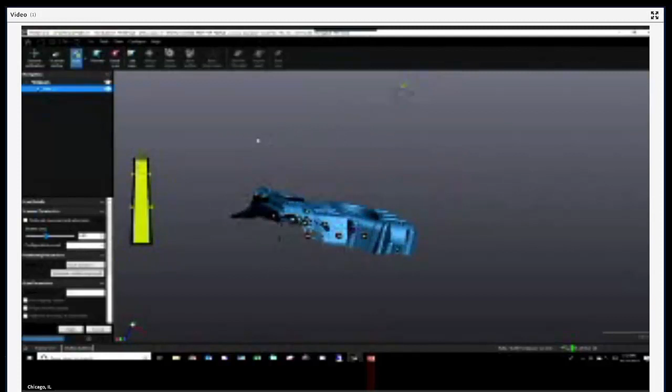But where it's really useful is out on the shop floor, where you're trying to take measurements and the guy with the forklift goes by at 20 miles an hour behind you, or you have big stamping pieces of equipment that are causing some serious vibrations and potentially ruining other forms of measurement. This form of measurement is really independent of that vibration, because obviously you can see some pretty big vibrations happening right now, and I'm still able to very accurately scan my part.

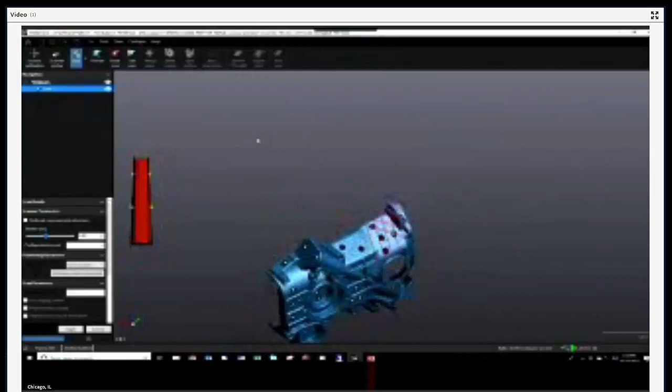So you can see from here, we can go into all different applications. We can go into VX Model, which is the reverse engineering application. We're going to be taking different entities off the surface of the part, porting them into SolidWorks, and using those as reference for our CAD model as we build up our SolidWorks model.

Or we can go into VX Inspect, which is for quality control, and that's how we're going to take a scan mesh and a CAD and overlay those and take measurements off of both of them. So what we're able to do then is, like I said before, take very large amounts of measurements very accurately and very quickly. So with that, I'm going to wrap up my presentation.